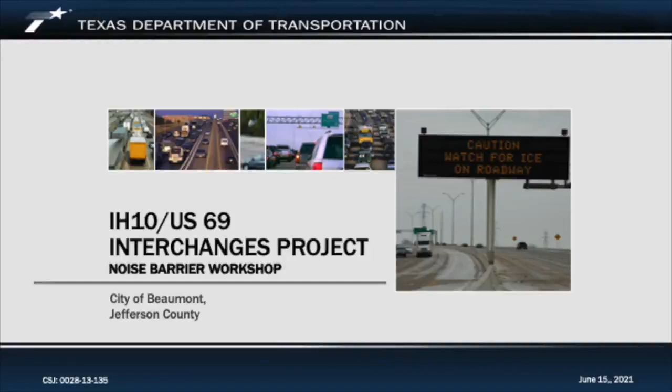I will be presenting a brief summary of the proposed IH-10 US 69 interchange project and will discuss the project's need and purpose and a description of the proposed noise barrier. We appreciate your interest in this noise barrier workshop and welcome you. The purpose of this noise workshop is to inform you about a noise barrier recommended near your neighborhood and to solicit your viewpoint as a resident adjacent or benefiting from the proposed barrier. To begin, I would like to talk a little bit about the project.

TxDOT and the Federal Highway Administration propose to reconstruct and expand IH-10 and US 69 where they converge in the city of Beaumont in Jefferson County. The proposed project would widen the existing I-10 from Hollywood Overpass east to 7th Street.

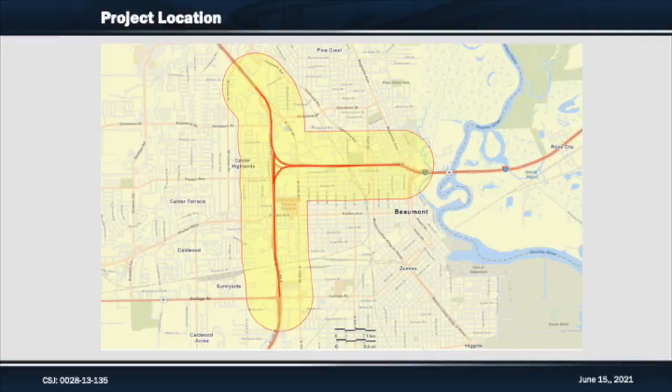What is our goal for today? First, to provide you with a general overview of our traffic noise analysis and criteria used to develop our preliminary noise barrier recommendation. Next, to explain your role in making your voice be heard. After learning about the proposed noise barrier, you'll be invited to cast a vote for or against the noise barrier.

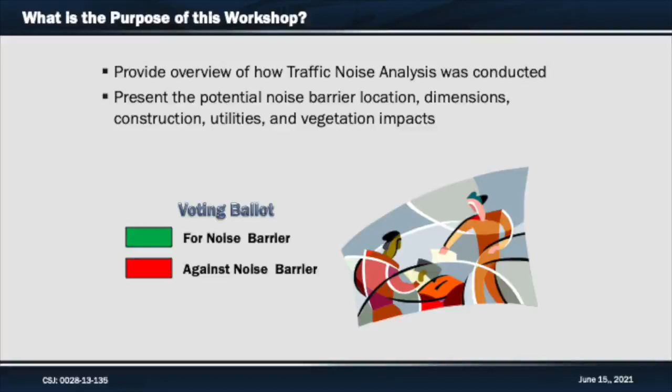Details regarding the aesthetic and landscape design elements as they pertain to the noise barrier are part of this presentation. We want to provide you with all the details necessary to make an informed decision in order to vote for or against the proposed noise barrier.

I will start out with some general information regarding sound and noise. Then I will describe how the traffic noise analysis and abatement process was conducted for this project. Then I'll describe the proposed noise barriers.

The purpose of the project is to alleviate congestion, to provide a more reliable transportation and evacuation route, to enhance connectivity and mobility, and to address safety. The two I-10 interchanges with US 69 in Beaumont are a critical part of the strategic freight network and hurricane evacuation capacity in southeast Texas. Tonight's presentation will focus only on the Eastex interchange.

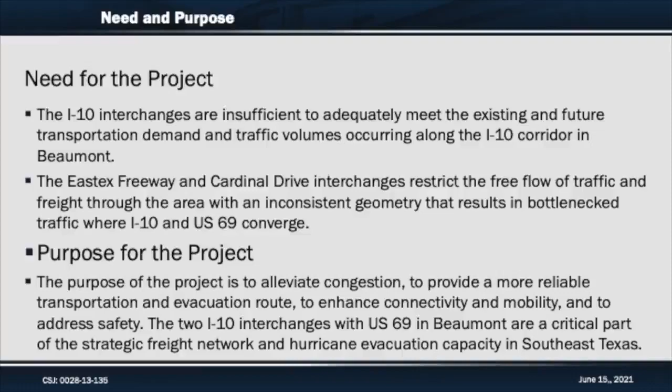This slide shows where the proposed noise barrier 4 will be located. Barrier 4 would be located between Blackmon Lane, south to about 0.8 miles. It will allow for movement of traffic in and out of the parking lot associated with the Copperstone building.

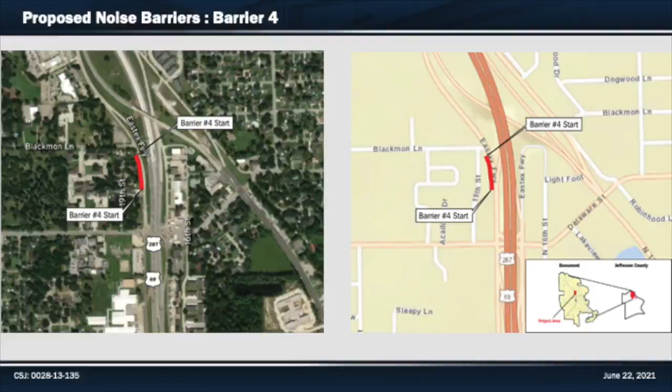Let us discuss some general information regarding sound and noise. Then I will describe how the traffic noise analysis and abatement process was conducted for the project. We will also talk about the proposed noise barriers. The project team will be available at 6 p.m. on June 22nd in a live noise barrier workshop to answer any questions that you may have.

What is sound? Sounds are vibrations traveling through the air as sound waves. Noise, on the other hand, is unwanted sound. Cars and trucks generate noise. This traffic noise is produced by the movement of engines, the vibration of exhaust systems, and the friction of tires against the roadway.

The loudness of noise from traffic depends on the road surface type, the amount of traffic, how fast the traffic is moving, and the number and type of vehicles traveling on the road. For example, 18-wheeler trucks with their bigger engines and many tires produce more sound than the typical 4-door passenger car. In general, the more traffic on the road and the faster the traffic is moving, the louder it will be for a person near the road.

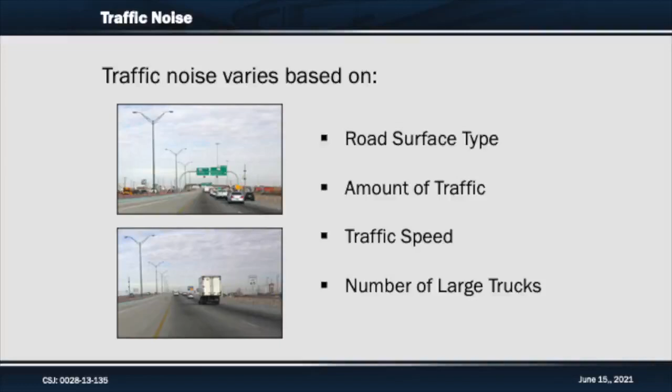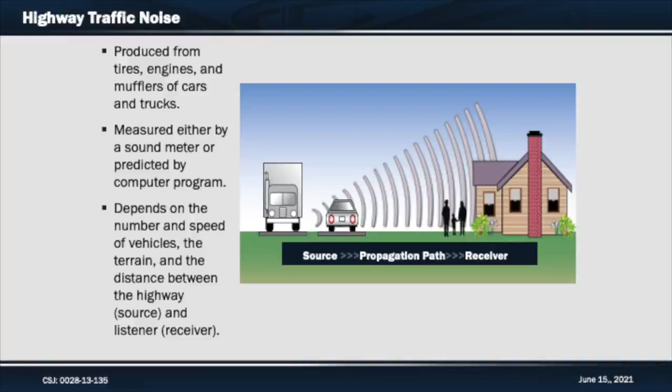Additionally, if you are within the line of sight of a highway, it is going to be louder than if you cannot directly see the road, because sound is loudest when it travels in a straight path. Sound waves move outward from a source in all directions. When there are no objects in between the source and your ear, noise will travel in a direct path. However, sound can be reduced by placing a solid object or barrier, such as a wall, in between the source and the receiver. The location and height of a barrier can affect the amount of noise that is reduced.

Highway traffic noise is often blocked by buildings. Tall fences can reduce sound levels, but no barrier can completely block all traffic noise.

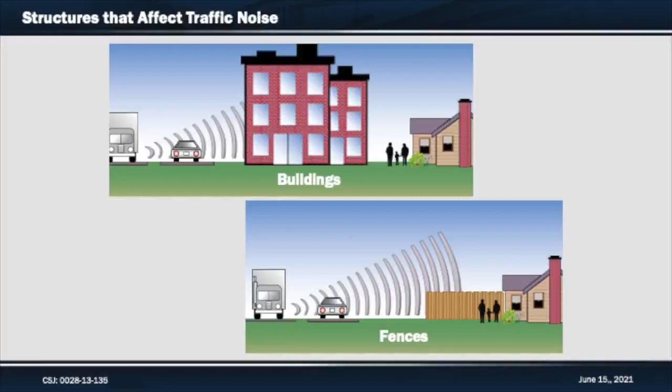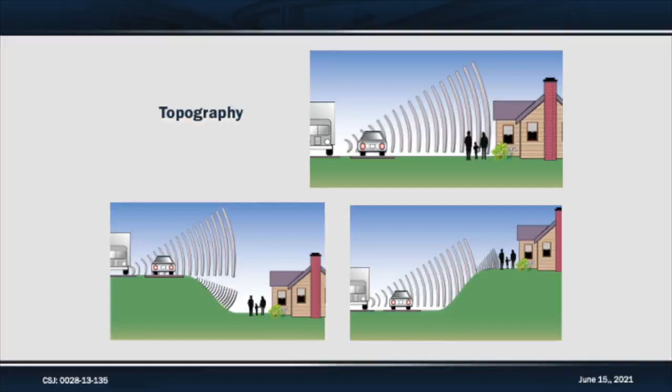Topography also affects highway traffic noise levels. When the highway is either higher or lower than the receiver, overall noise levels are reduced. In both these cases, the sound waves have a longer path to travel.

So how does TxDOT evaluate traffic noise and noise abatement for highway projects? The Federal Highway Administration, or FHWA, requires that we conduct noise studies when federal funds are utilized and when adding capacity on existing highways which may have an increased effect on noise. The purpose of our noise study is to investigate the impact that the I-10 US 69 Interchanges project has on the nearby outdoor areas frequently used by people.

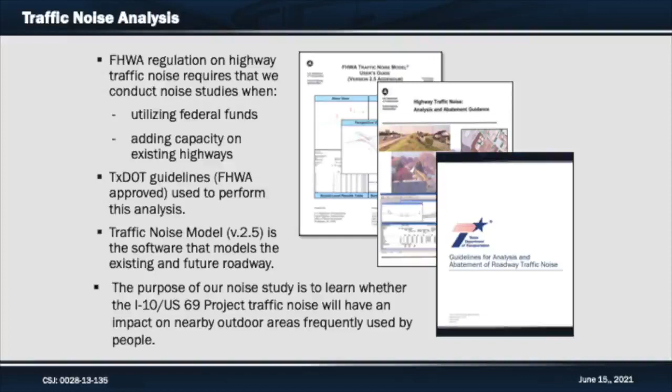The noise analysis for this project was performed in accordance with TxDOT's Guidelines for Analysis and Abatement of Roadway Traffic Noise and Reasonable Cost Proposal for 2018 Noise Policy. The TxDOT guidelines have been approved by the FHWA. The Federal Highway Traffic Noise Modeling Software, known as Traffic Noise Model or TNM, was used to calculate the existing and predicted future traffic noise levels along the roadway project.

A traffic noise analysis is a multi-step process. A noise workshop is usually one of the last steps in this process before the final engineering plans are approved and the project is constructed.

The noise analysis process includes identifying noise receivers, modeling noise levels, identifying potential noise impacts, considering abatement for noise impacts, and finally, talking to the benefited residents and owners adjacent to the road about the results of the noise analysis and soliciting the vote of property owners at a noise workshop.

The purpose of a noise analysis is to determine whether traffic sounds from a highway will have an impact on nearby outdoor areas frequently used by people. These areas are called receiver locations or receivers. Some examples of receivers include residential backyards, playgrounds, and schools.

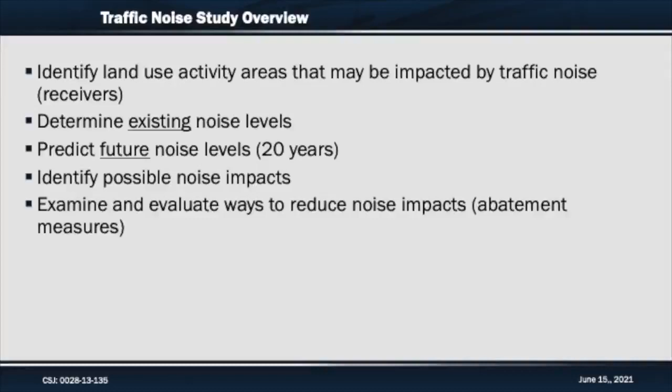After identifying receivers, a noise analyst determines existing and future noise levels at these locations. Then, based on the predicted noise levels and criteria, the noise analyst identifies possible noise impacts and looks at ways to reduce those impacts. The traffic noise analysis is performed by using an approved computer modeling software called Traffic Noise Model.

Version 2.5. The computer model requires the analyst to enter noise receiver locations, the amount of traffic, and traffic type. Traffic type is a percentage of cars, medium trucks, and heavy trucks. The model also considers how fast the traffic is moving, the roadway design, and surrounding terrain features.

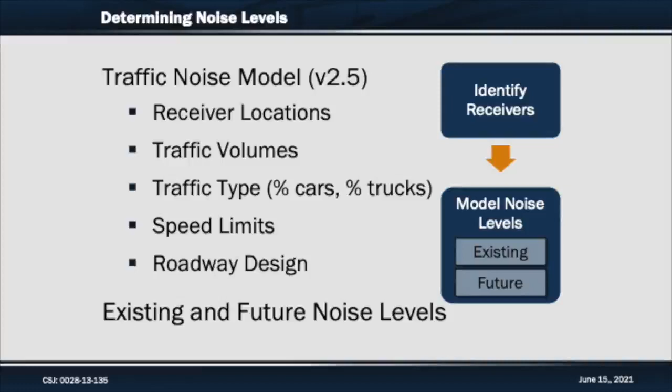Traffic noise is modeled for both the existing traffic and roadway conditions and for future traffic projections and the proposed highway design. So how do we determine if there will be a traffic noise impact?

We use noise abatement criteria established by the Federal Highway Administration. The noise abatement criteria, or NAC, for residential land use is 67 decibels. A decibel is a measure of the loudness of sound.

There are two types of noise impacts. An absolute impact is when the predicted noise level at a receiver approaches, equals, or exceeds the noise abatement criteria value. For residential properties, an impact would occur if the predicted noise level is 66 decibels or more.

A relative noise impact is when the predicted noise level is substantially higher. This is when the future noise level is more than 10 decibels higher than the existing noise levels.

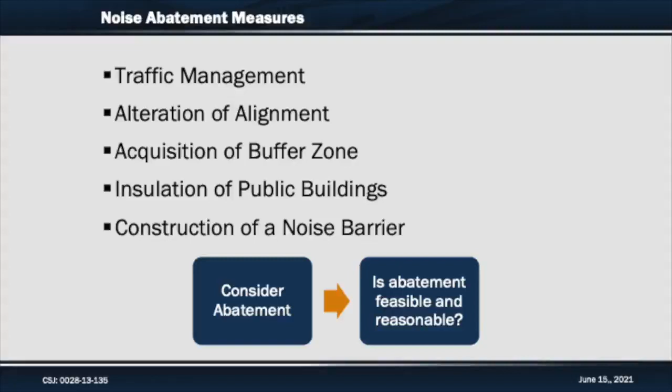If there is a noise impact identified, then the next step is to consider abatement measures. Abatement measures are actions that could lower the noise level. These include traffic management, alteration of alignment, acquisition of buffer zones, insulation of public buildings, and finally, the construction of noise barriers. Construction of noise barriers has been determined to be the best solution for this project.

What is a noise barrier? Noise barriers are solid walls or barriers that are constructed between the highway and people in order to help reduce roadway noise levels. Noise barriers can reduce noise levels, but do not completely block all noise.

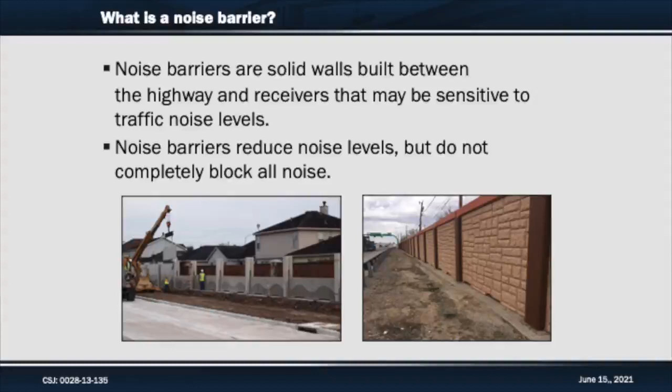However, a noise barrier cannot be proposed unless the barrier is determined to be both feasible and reasonable. What makes an abatement measure feasible? Feasibility first means that a noise barrier can actually be built in a location, given site constraints such as topography, driveway access, drainage, utilities, and maintenance.

Feasibility also means that the noise barrier must provide a substantial reduction in noise levels. A substantial reduction is defined as a reduction of at least 5 decibels at greater than 50% of the first row impacted receivers.

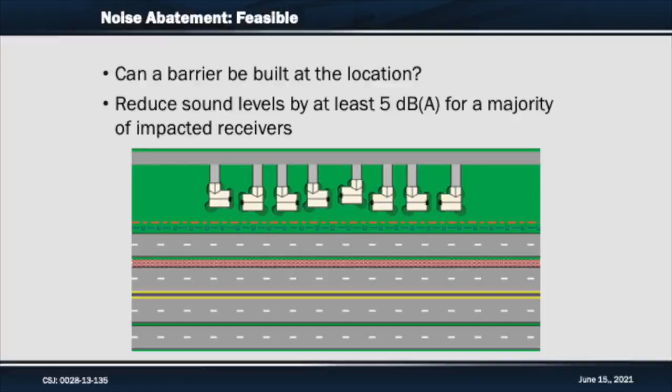The second criteria is that a noise abatement measure should be reasonable. There are two measures of reasonableness. First, the baseline cost of a barrier is $25,000 per benefited receiver. Second, a proposed barrier has to meet a noise reduction design goal to provide a 7 decibel decrease for at least one impacted receiver.

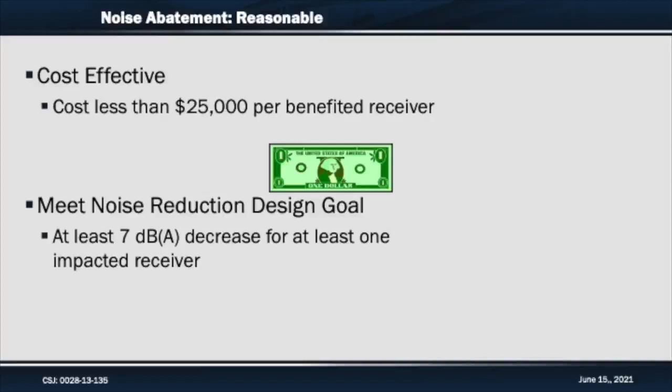For this project, noise levels would approach, equal, or exceed the level at which the Federal Highway Administration would consider noise abatement. As a result, noise barriers were evaluated at the I-10 and US 69 intersection.

It was determined that the construction of noise barriers in 4 locations along I-10 and US 69 could provide feasible and reasonable traffic noise abatement for this project. In this presentation, we are discussing Barrier 3 along US 69.

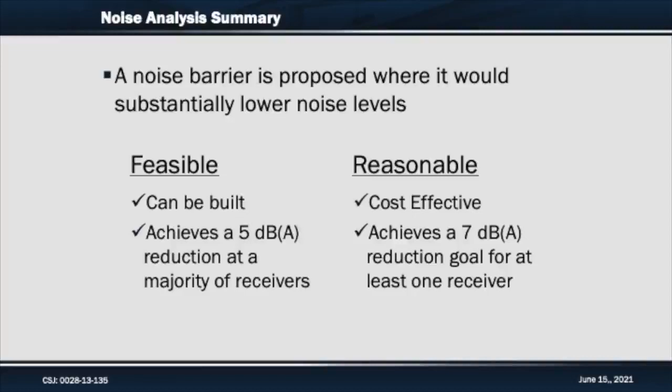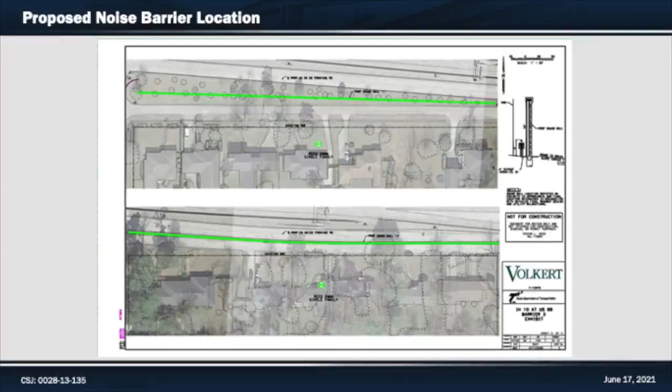This slide shows a preliminary layout of Barrier 3. Barrier 3 would be in 2 segments. The entire barrier, including both segments, will be 1,311 feet in length and 18 feet tall. It would be located on the I-10 frontage road from 8th Street to 10th Street.

To show you what the proposed noise barriers might look like, here are some examples. The top 2 photos show noise barriers in San Antonio and Corpus Christi. The bottom 2 photos show noise barriers in Austin.

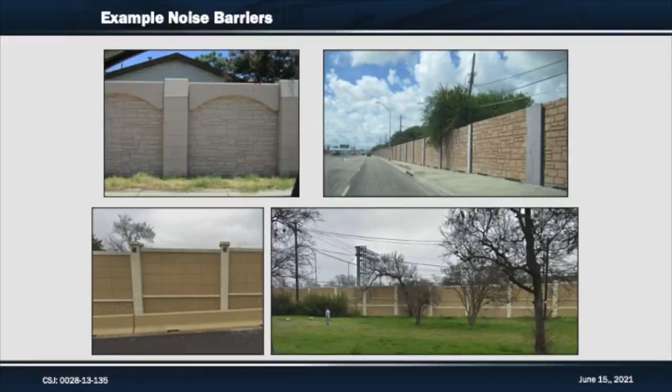Noise barriers are intended to provide positive aspects to neighborhoods, but there are some negative impacts that can occur as well. Noise barriers are designed to reduce traffic noise and are normally well received. However, they can also result in restricted views, feelings of confinement, can affect sunlight, and in some instances, limit access to nearby streets.

Noise barriers may also provide a surface for graffiti. Finally, it's important that you know that a noise barrier will not eliminate all noise. There will still be noise, but it would be decreased.

So, who can vote? To be eligible to vote, you must be the owner or resident of a property that touches a right-of-way line near where a barrier is proposed. Only 1 vote is allowed per property. Some residents that are not directly adjacent to the right-of-way line have also been identified by the noise model. Those persons can also vote.

Not all votes are counted equally. A weighting system is applied based on owner occupancy. For owner-occupied dwelling units, the property owner's response counts as the 1 vote. If multiple ballots are received from multiple owners of the same unit, for instance, a husband and wife each submit a ballot, they are collectively counted as 1 vote.

For non-owner-occupied dwelling units, a response from the resident or renter counts as 10% of the vote, and a response from the owner counts as 90% of the unit's vote.